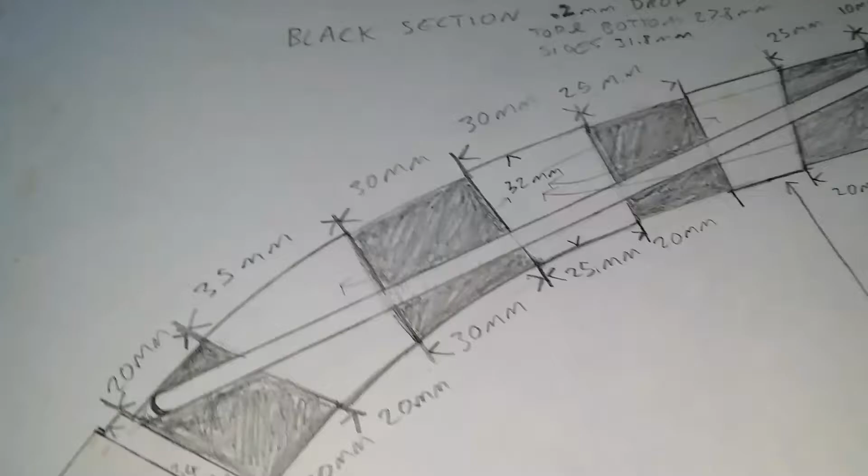Regarding this sabre, if I do it as a run, right? This is what I'm talking about by the imperfections. This sabre is seriously solid. You're going to be able to duel with this. Simple as that. The imperfections I'm talking about and the work that's going to be needed to get this up to a high standard for anyone to want to display on their shelf is these mould lines.

You see the edges here aren't straight. You've got these plugs. This is where the plugs come in when they do the casting. You've also got imperfections like this line along here where it should have this texture. So really you need to polish out this whole section to get it up to a high level. And then here is where another plug was put in and they weld the hole up. This is why I can't have them made in aluminium, because the plug holes they can't weld on aluminium, but they can weld the bronzes.

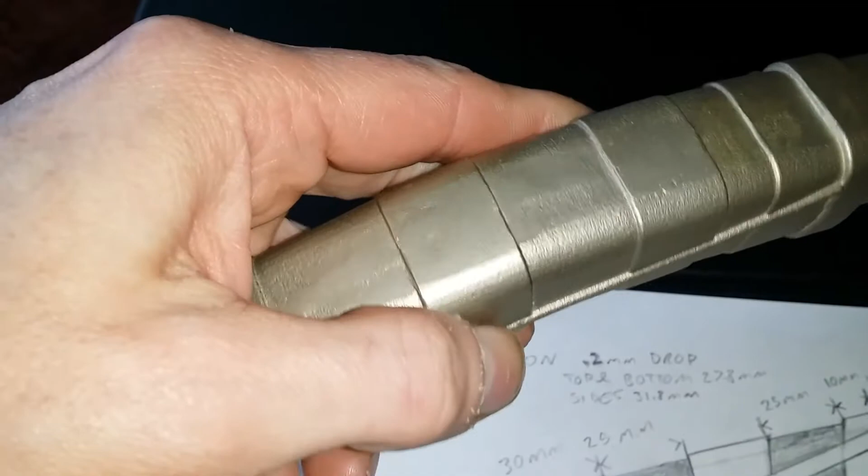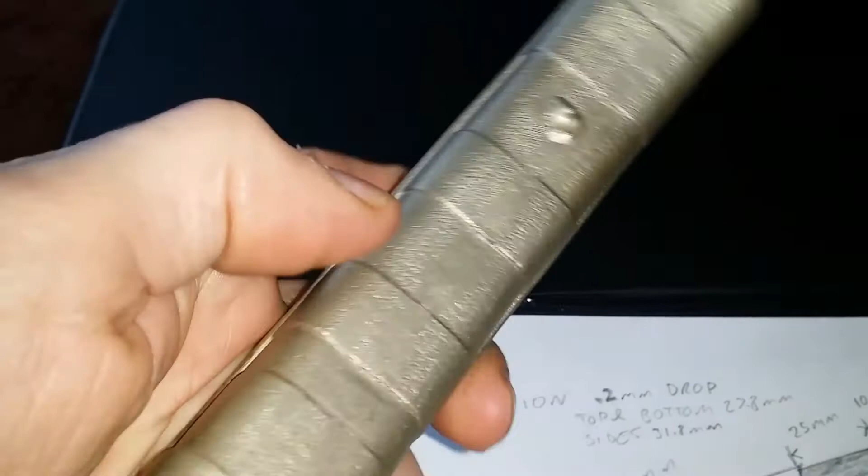So you see you've got these edges that are not quite straight. Filing, you can get them nice and straight, but it takes a lot of work. You've got this plug here. Basically you're going to need to hacksaw that off or use a grinder to cut it off, and then file it flat so that you can put the pommel on. Like these little imperfections, these little divots, little lumps that can be filed off. And underneath that's another hole that's been welded up where the core plug went in for the cast to be made. And you've got these sort of marks here.

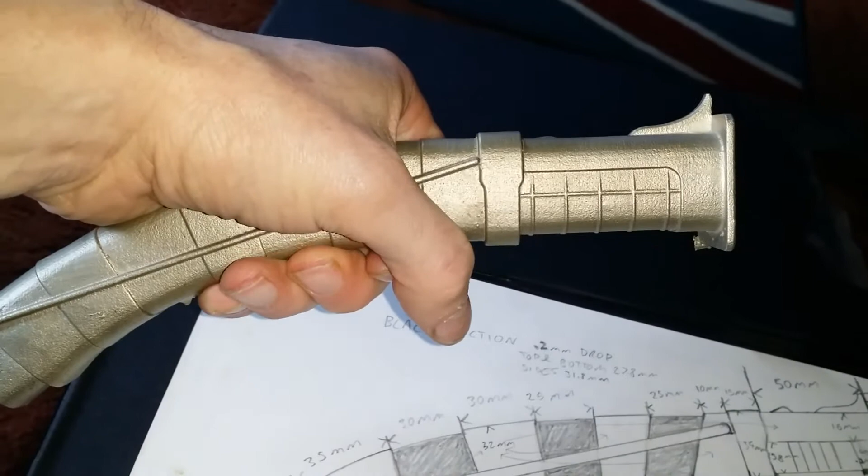If you're going for a weathered look, it'll be brilliant. It'll look like a used weapon. Ventress used her weapons a lot, so unless she was into keeping them clean and sparkly, which I very much doubt, it's going to fit perfectly with a weathered version. In terms of size, I can't say offhand, but I would say it's around about the same size, maybe a tad longer than Erin's full switch sabre.

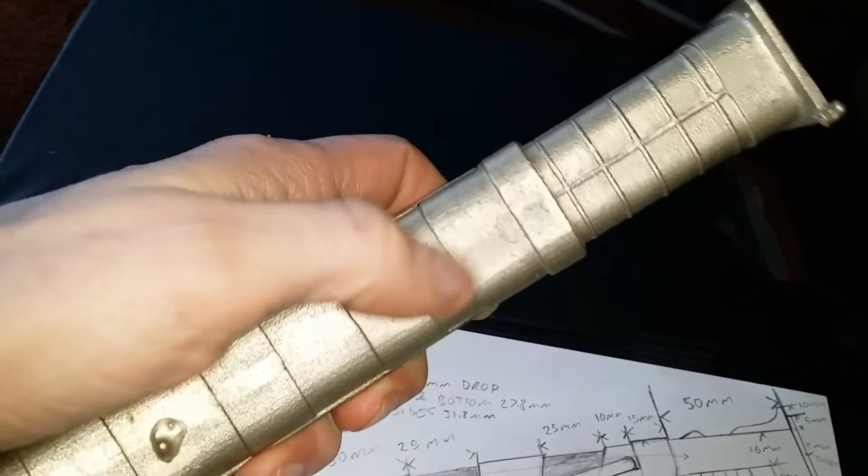And for anyone that might think this is one of Erin's and I've ripped it off and taken a cast from it, trust me, it's not. Erin's has got a secondary blob on the top. The pommel for this is completely different. The shaping of the handle at the back is completely different. It hasn't got the holes underneath for switches, for starters. It hasn't got a separate piece that is held on with Allen bolts or grub screws. I can't remember what Erin designed these with.

This is where the hard work starts to come in. This is too small for a 1-inch blade, and it's too big for a 7/8. So you need to either file this out like I have done to fit the 1-inch in, or make a sleeve that will sit in there, which is probably what I'll be doing. But this one, because it's just a prototype, I've just filed it out so I can get an electronics install done.

The inside is not very clean because it's cast, but it's good enough that I'll be able to make a chassis to hold the board at one end with some flexy bendy piece which will allow me to slide the battery in up to here. I've test fitted it with the 7.4, and I can get the 18500 to slide up to here, then the board sits right at the end, and the speaker can go in the pommel. So 7.4 is possible, but most people will probably go for a Prism or a Nano, or maybe even a Stunt, which is even easier.

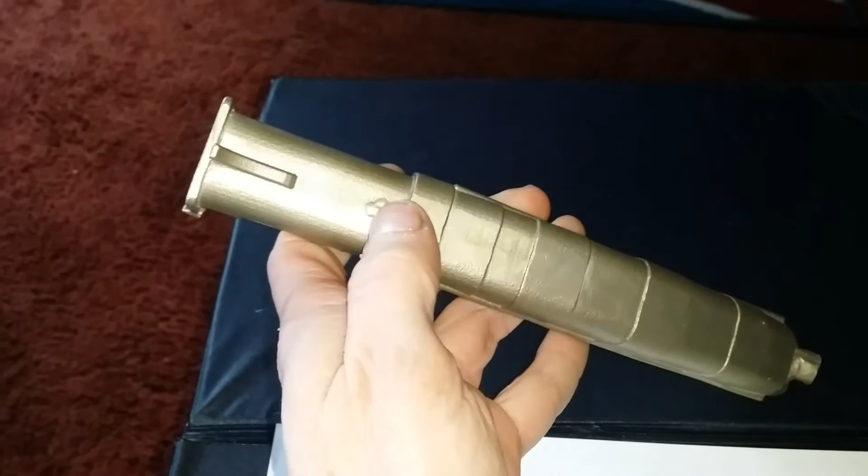I'm planning on fitting the power button right here where this weld mark is. When that's filed back, it will be drilled and a hole will go in. The blade retention screw I'll be putting underneath here. For anyone doing an OGS setup with a separate button, I would suggest doing it on this bit here or on the underside of this, but more than likely here would be best, so you could have your top for power and your OGS underneath.

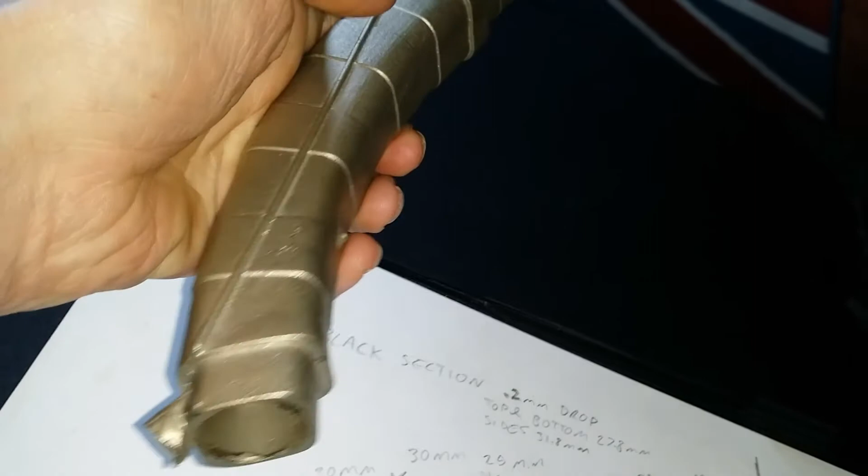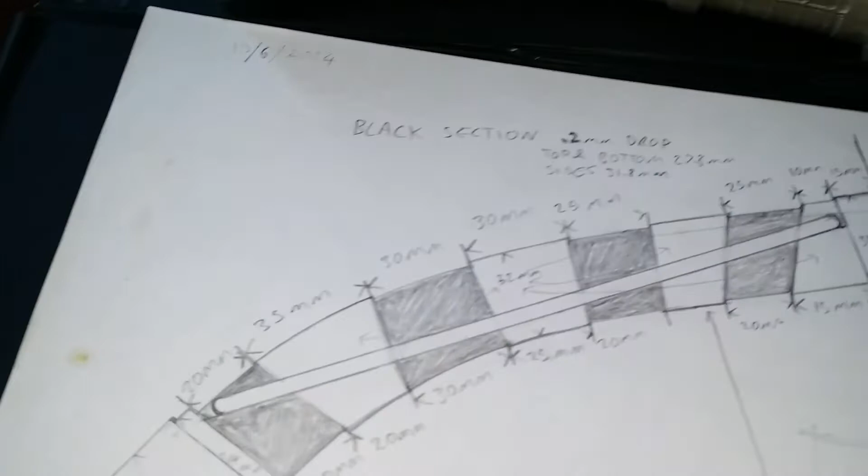This wasn't something I took lightly. When Aaron first did the Force Witch, I was designing this sabre at the same time. This is a drawing. This drawing isn't this sabre, it should be stated. This came from a 3D print, which I got permission from the designer to use as a cast to make my sabres. This is a design picture, and you can see the date, the 10th of the 6th, 2014, I was designing this sabre back then.

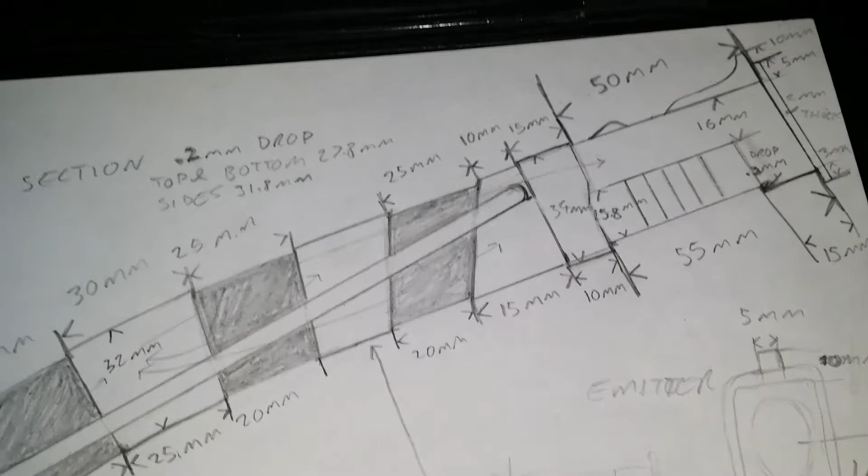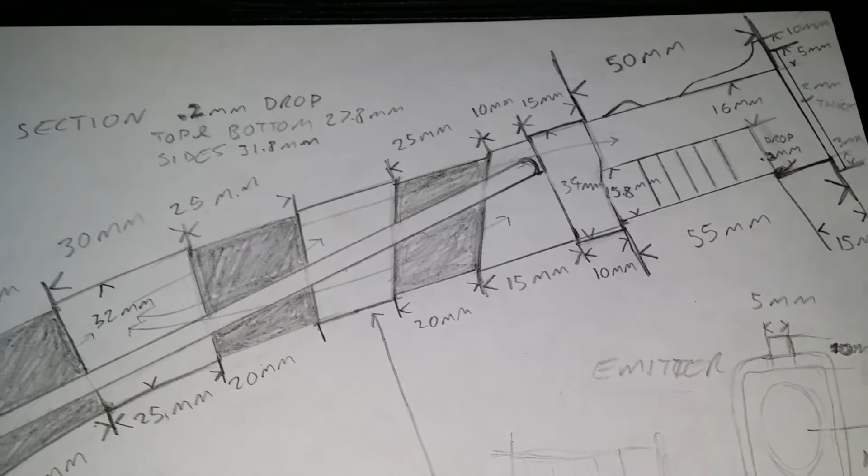I've got messages and I spoke quite a lot about this. When Aaron posted up the interest thread for the Ventress, he had the idea as well; we both came up with the idea around the same time from my knowledge. I've still got all the messages and posts on the Imperial Royal Arms where I was speaking to Aaron about his design. We've had a lot of conversations over the last few years about sabre designs. You can see I was coming up with all the dimensions, but the reason I dropped doing my own was literally the cost involved.

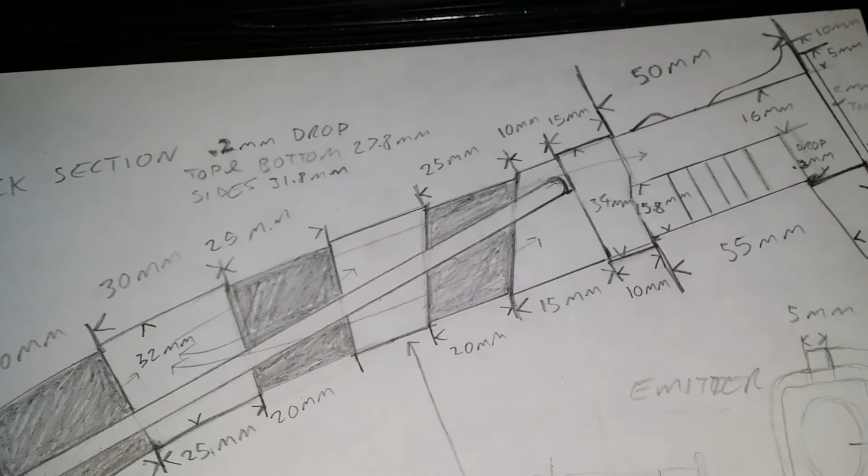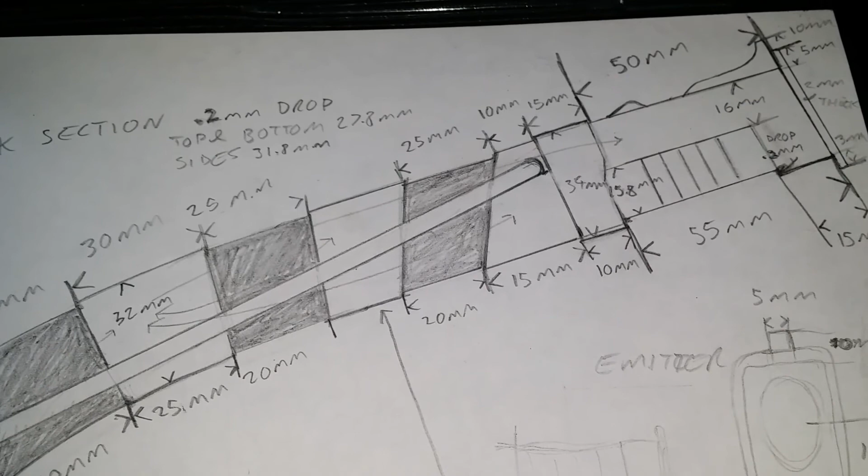When Aaron sells his sabres and you think, why is the Ventress, the Force Witch, costing so much more than the other lightsabers? You need to understand, when you're using 3-axis, 4-axis or 5-axis milling machines, with all the design work, not to mention the machine runtime, it just wasn't cost effective for me. Aaron has all his own machinery, I don't. I'd need to sub this out. So when you think his sabres cost too much, no, they don't.